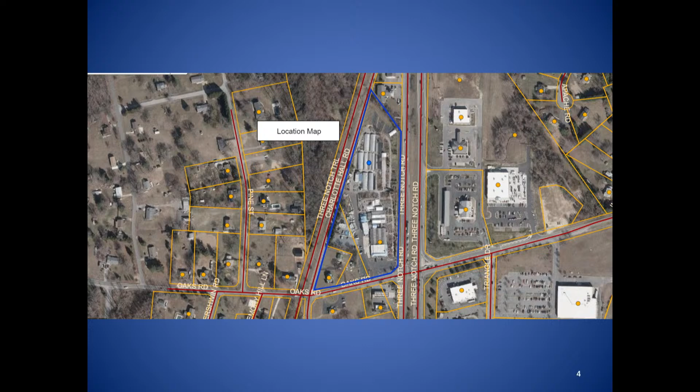Good evening, Chair, Vice Chair, and Planning Commission members. Agenda item 1 is a concept site plan for three-notch commercial. The concept site plan seeks approval for a 5,380 square foot convenience store with fuel sales and a 2,365 square foot fast food restaurant with a drive-through. The site is located at 37590 Oaks Road and 30315 Three Notch Road in Charlotte Hall. The land use is mixed use moderate intensity, and the zoning is town center mixed use.

Use type 60 is fuel sales, which are establishments engaged in the retail dispensing or sale of vehicular fuels and lubricants or household propane. Use type 48, convenience store, are retail establishments engaged in the sale of prepackaged food products, household items, newspapers and magazines, and sandwiches and other freshly prepared foods for off-site consumption. Use type 74 is a fast food restaurant, an establishment that offers quick eat-in or takeout food service, accomplished through a limited menu of items already prepared and held for service, or prepared, fried, grilled quickly, or heated in a device such as a microwave oven.

Use type 115 is an accessory use for drive-through services, which are facilities that provide services to persons remaining in automobiles. The regulations for the Town Center Mixed-Use District provide opportunities for residential and commercial development within town centers, consistent with the comprehensive plan. Standards are intended to create an urban character and make the core area feel safe, pedestrian-friendly, and visually attractive.

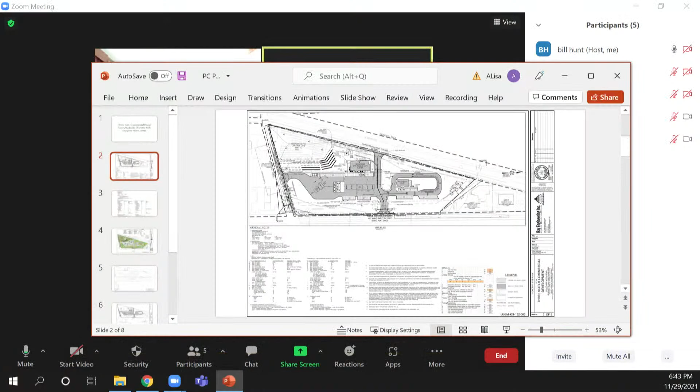All right, thank you again. Thank you for allowing us to be here this evening, and I'll just start right off. Okay. Yeah. Just start with the first, yeah.

So the existing property is 3 parcels. The existing use is an existing house to the southwest corner of the one parcel, and the remaining 2 parcels is where the Wentworth's business straddles, right? The 2 parcels, so there's 3 parcels. Just before I forget, and because I'm getting old, we're intending to plat so that the 3 lots will become 2, one parcel for the Starbucks, one parcel for the Royal Farms. So there will be a lot line adjustment for this property that will happen.

As staff noted in the report regarding the square footage of the site, it's a Royal Farms convenience store with fuel. There is regular fuel and diesel fuel. If you look at the plan, you'll see on the left that the angled canopy area is where the diesel fuel would be, and the remaining area would be regular fuel.

The setup is that you see the black, darker boxes - those are piers, and in the center is the dispenser, so you have one car on each side. If it was full, 12 vehicles would be parked. As far as the diesel fuel, whether truck small or large, you would have 6 of them on the left there, to the south of the site plan.

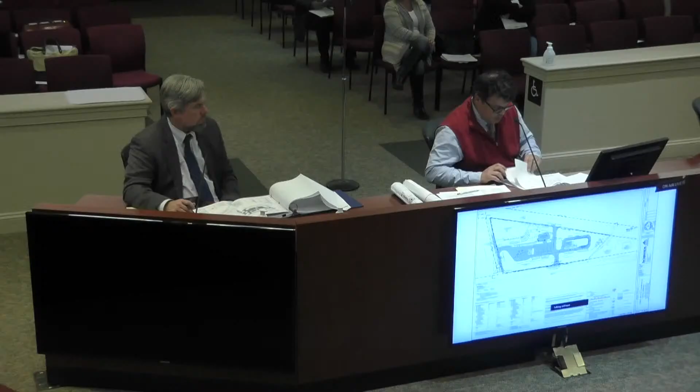With regard to stormwater management, environmental site design, which is required per the state for our engineering, the site impervious area was actually close to 206,000 square feet. The development is not quite half, but it's close - it's about 117,000 square feet. So from an environmental standpoint, an impact, it really will be enhanced. It didn't have stormwater management before. It will have it now with the design, and there's less impervious area.

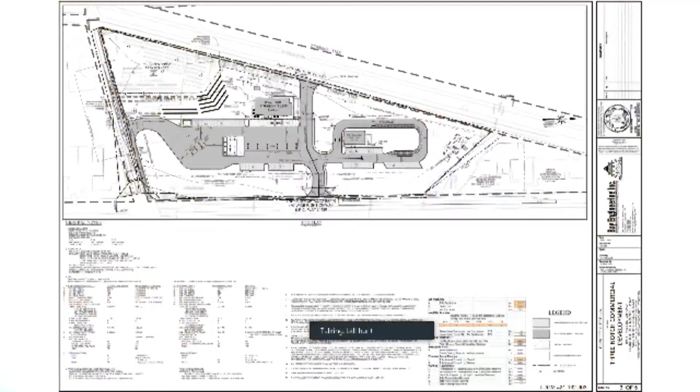So from that standpoint, there are improvements. You can see on the slide here, to the right or north corner, there will be a gravel wetlands device that will capture a majority of the water. Everything flows down to that point. There's a ditch between the two properties - this property we're developing and the adjoiner - and the water all flows down to that point. As far as drainage goes, it goes across the road through a culvert and underneath the trail, and then continues on the property to the west. That's the basic drainage pattern of the site.

So we're able to collect the water, treat it before it goes off-site, and that works out well from that standpoint. Vehicle circulation is pretty standard internally for the site. Vehicles coming in will go right or left and be able to circulate. There's ample parking for both sites - more parking than required as far as code on the Royal Farm side, but we mitigate that through the code with additional plantings, which staff has reviewed and approved.

And we could probably slide, if you don't mind. That's a lot of numbers. Keep going, please. There we go. That's, as they say, a prettier picture.

So this is the rendering, and you can see the green and the landscape. This again is preliminary - we have our buffers required per units, but have not yet picked species and such. But as far as the numbers, we meet the requirement for what we have, either for buffers or internal parking offsets and needs.

If you're on Three Notch Road, you'll see to the north a sidewalk that comes up. There would be an ability to cross at that point, and sidewalk connects to the Starbucks. The sidewalk then runs again on the north of that combined road, gets you to the Royal Farms. There's pedestrian accessibility along the front of the Royal Farms to the east side of it. Then the walk continues south, gets to Oaks Road again, and heads west to the intersection of Oaks and Charlotte Hall Road.

And am I correct, there's a notation on the site plan showing there's also a bike rack for any individuals that may ride bicycles to the site? Yes, it's pretty standard for both sites, both Starbucks and Royal Farms, to have bike racks. They like to incorporate that in their site designs.

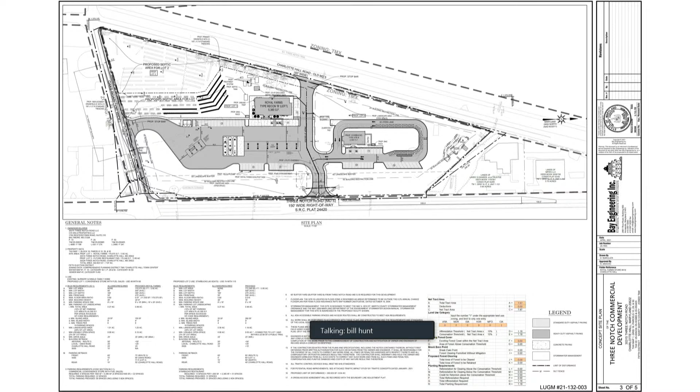Do you have anything else you'd like to add about the site plan? Ms. Chandler will jump in a minute and talk about the traffic issues. I always tend to think talking less is better, and I'll take questions if needed.

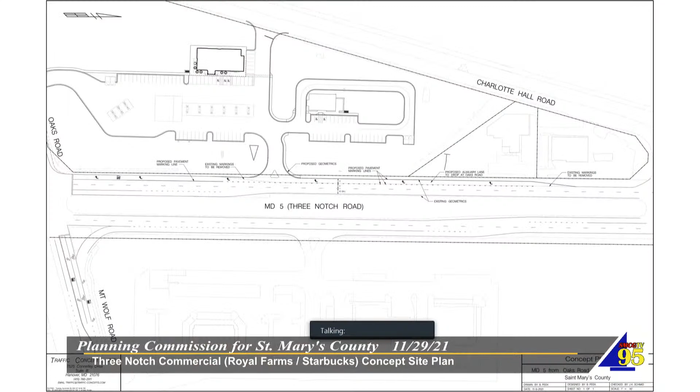I see the sidewalks here now, the internal ones. When you were pointing to your screen, it wasn't really being pointed out on the viewer screen. I just wanted to see if maybe we could get a tighter picture of that so they could see where those sidewalks are running within that site, if that's possible.

I think this slide probably shows it best. I don't think you guys can see mine. If you put the arrow there, Courtney. So there's the walk as it connects to Three Notch, going west to the north side of that entrance, and then you have connectivity going across. There would be a hatched area for pedestrians to cross. Then the walkway gets you either to the Starbucks, or you'd go up and then to the left or south, in front of the Royal Farms, and that sidewalk continues all the way to Oaks Road. Then connecting to Oaks Road, it would go west to the intersection of Oaks and Charlotte Hall Road.

Were you planning on having any sidewalks out on Route 5 itself? I see you've got one from Route 5 into your site, but along Route 5, were you going to put any on there? We currently don't show any, but if it was something conditional or something that needed to be addressed...

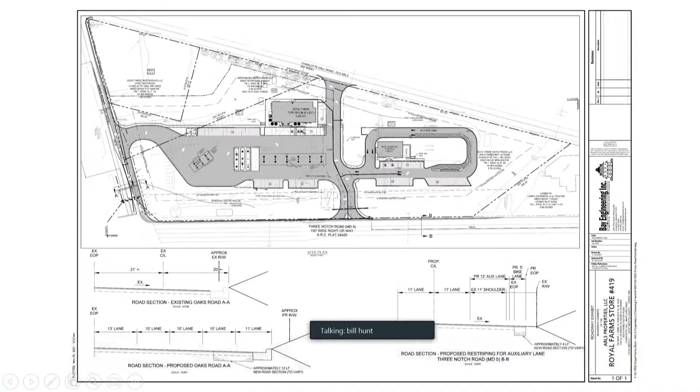Yeah, so actually Mr. Hunt can show you the aerial, you're looking at the aerial. So there's a lot of structures and buildings out there, and when we did our ALTA survey, or higher level surveying, we went out there and actually started locating stone, gravel.

There's just stone and gravel everywhere, with some green on top from plants, but when you move that stuff aside, there's a lot of impervious area. Actually, the way it worked from a code standpoint, from stormwater management for the state, it met the requirement for what's deemed redevelopment, because the impervious is above 40% for the site.

We also had some preliminary soil borings done out there, and a lot of times we find this with older sites that have been abandoned, where the weeds have grown and you look at an aerial and it looks like it's all green. But you go out there and do a boring, and it's just a little bit of skimming on top, 8 inches of stone and a bunch of junk buried. There's technically no pervious happening, it's basically just a surface skimming of dirt and weeds that have grown, but there's nothing there. So we found a lot of graveled areas out there.

So when we mapped that all out and showed it to the engineering department and reviewed it, it was clear that it met the redevelopment requirement, and the impervious was going to be decreased by quite a bit. Plus the fact that it had no stormwater management prior. No, it had no stormwater management.

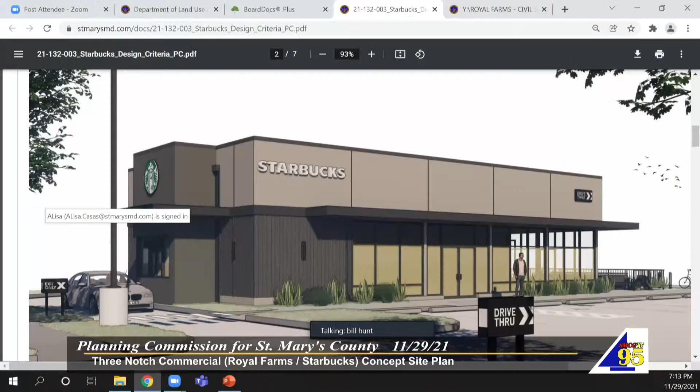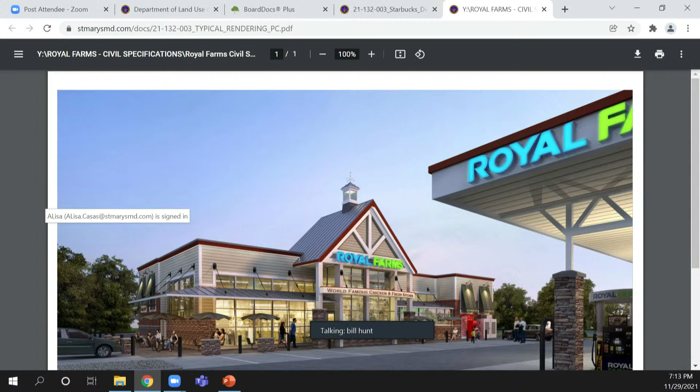And there's the Starbucks that I see on the screen. And if you look at the Royal Farms rendition, it is markedly different. Right, I can definitely ask.

The typical situation with Starbucks is they will not build or construct their building, so that becomes our responsibility. So I suspect, but once again I can't promise you at this point, that if we're willing to put in additional capital, they may be willing to work with us. As you pointed out, they do take other buildings and retrofit them to be a Starbucks. So I think that is a possibility, and that's something we can request of them.

I guess what I'm getting to is that what they want is, when somebody drives by, they want them to instantaneously recognize it as a Starbucks. I get that, and I get the colors, and the colors in this other location are actually pretty close. But again, there's some architecture involved in that location in California, a more traditional look than this. And given that these things are going to be side by side, I understand what Starbucks wants, but Starbucks is a big company. Just because they want it doesn't mean they get it.

I can jump on to what Mr. Evans is saying, Mr. Rosemore. The one attachment we received, the traffic mitigation proposals, has a lot of aerial photographs on there, and you'll see the Wawa and some other unlabeled building across the street. Obviously the Royal Farms renderings that were shown to us all show peaked roofs, and this Starbucks option plus the two alternative options all show a flat roof.

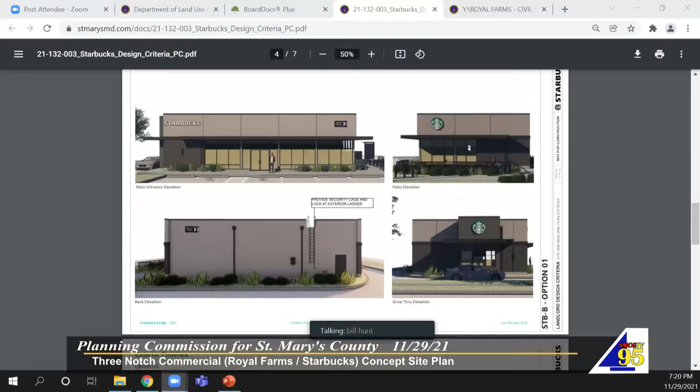Okay, nickel and dime you right to death, but that's just what we do. No, that's okay. And that rendition that's up, the backside - I get it, backsides of buildings are backsides of buildings, and it's not a problem unless you have to look at it. So I think that's a fairly inexpensive way of addressing that back wall.

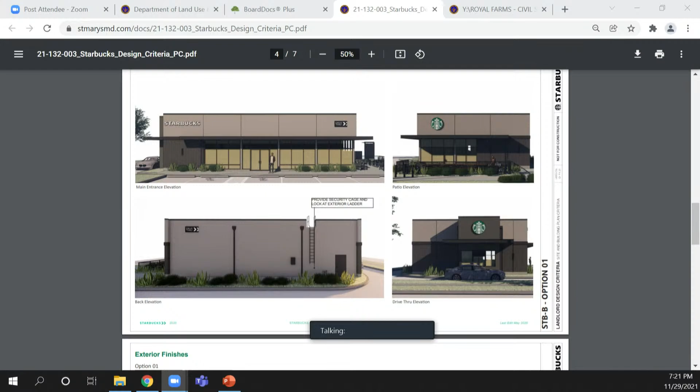Yes sir. Okay, is there any other questions or comments for the applicant? No, traffic questions - we're saving it for traffic.

Batter up, Ms. Chandler, it's your turn. Was there anything you wanted to add? No, I think that's all. We have a couple slides that Ms. Chandler can go through on traffic. I don't think she's sworn in yet, Mr. Chairman. Oh, I'll definitely get her.

Ms. Chandler, I can see you, so I'm counting on you to raise your right hand. Do you declare and affirm under penalty of perjury that the testimony, responses, and statements you may give will be the whole truth and nothing but the truth? I do. Thank you, ma'am.

Would you give us your name and address please? Sure, Jackie Chandler with Traffic Concepts, 7525 Connolly Drive, Hanover, Maryland, 21076. Okay, Ms. Chandler, go ahead and start with your part of the presentation, and we'll pepper you with questions. Thank you.

A traffic impact study was prepared for this project to determine the adequacy of the intersections nearby. Those intersections included in the traffic study were the 3 access points for the development, as well as the triangle area - that includes Maryland 5 at Charlotte Hall Road, Maryland 5 at Mount Wolf and Oaks Road, and also the 4-way stop at Charlotte Hall Road and Oaks Road.

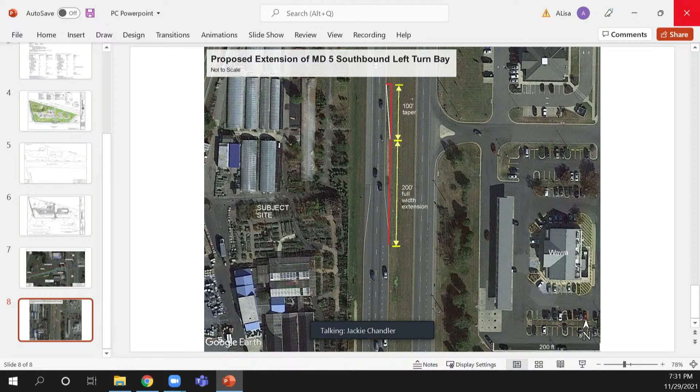Okay, we're getting to that. Hold on one second—I apologize, I'm also watching you guys on YouTube and that's a little delayed. Was that sharing now? Okay, I think that's it. Yeah, that's it.

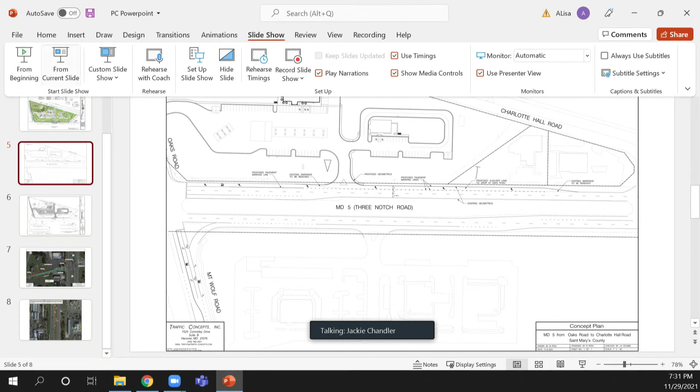So that existing right turn lane is being extended back beyond the right-in, right-out access. I was talking about Oaks Road, three lanes. There's not a lot of right turns coming out of Oaks Road during the peak hours, and they're controlled by the traffic signal.

Yeah, that's the problem—they're going to be stacked up waiting for people to be able to move with the flow of traffic, and they're all going to be backed up waiting to make a right-hand turn. I see what you're saying. So during the peak hours in the morning, there's 14 vehicles per hour making that right turn, and in the afternoon it's 28 vehicles during the peak hour. So even in the higher PM peak, that's one car every 2 minutes.

That's the projection. Ms. Chandler, can you state where you got those numbers from? The commissioners are asking that. I don't know if you heard—I could not hear that, I apologize. Traffic counts were conducted at the intersection.

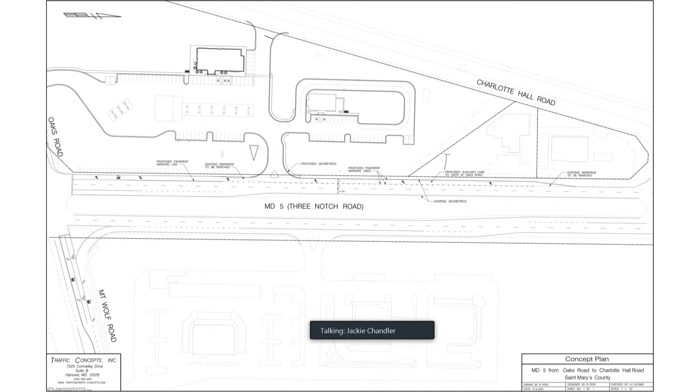So those were existing volumes, and then we added in the percentage of folks that would come out of the site that would actually use the Oaks Road access to make a right, rather than coming out of the new right-out access on Route 5. Was that during—

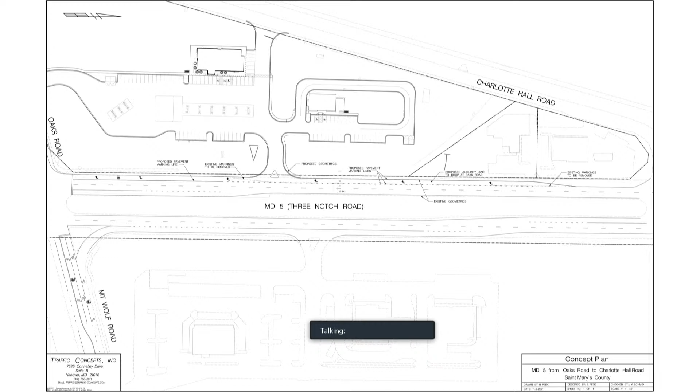Was that a week? Ms. Chandler, did you hear that question? She's on a little—no, I'm sorry, I'm not able to hear the commissioners. The question was were those counts taken during the week or on a weekend? Was that right, Ms. Robert? They are weekday counts. We're required to analyze during the morning peak hour during the week and then the afternoon peak hour during the week.

And those were actual counts that you all had done? Correct. That must be a different road than I travel on. Yeah, there—me too, me too, because it's a little bit busier than that. Yeah, hold up, I'm not doubting your counter, I'm just in doubt, let's just say that.

Can I ask a question? Yes. On what we're looking at now, that was the actual count that they were taking. The whole object behind a business being there is to increase the flow of traffic, so you're looking at actual versus what's projected to come. Is there—I believe Ms. Chandler said they took the actuals and added their projections that would be coming out of the Royal Farm site.

But Jackie, did you hear Commissioner Sinclair's question? I did hear that, yes. And so understanding that, we have most of our volume using this new right-in, right-out access to come right out to go southbound on Route 5.

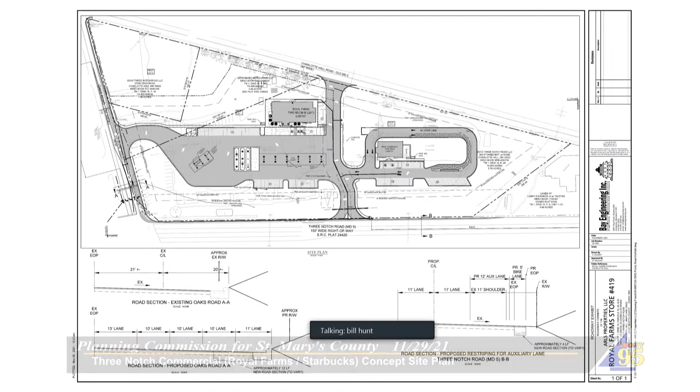I'm having a hard time seeing it. The length of the road from Route 5 to Oaks Road heading southbound - what is the distance from that exit heading south to Oaks Road? I can't see it on my prints. Does anybody have it? I think it's right around 500 feet, from the proposed access to Oaks Road.

Jackie, is it the same access point right now from Wentworth onto Charlotte Hall Road? Or maybe Nelson has that answer. Actually, there is a rear entrance where there's an existing gate. You can see the landscaping on the sketch everybody's looking at, and at the end of the landscaping there is an entrance there. So to your point, Justin, there is an existing exit from Wentworth at that point. If you've been back there, they have the chain link fence and gating back there. That's about where the entrance is right now.

And do you know the distance, Nelson? Just checking on Google, it looks like 600 feet roughly. Yeah, it's approximately somewhere around 550, I would say, to be safe, about 550.

Joe, was your question about Charlotte Hall Road or Route 5 to Oaks? Because I want to know what it is from 5 to Oaks. That's what I was asking. Okay, from the right in, right out down to Oaks - I think you guys answered for Charlotte Hall Road. I think it's approximately 500 feet along Route 5 from the right in, right out to Oaks Road. Because the right in, right out is per se close to the middle of the improvements, you can see the dimensioning on this plan: 530 feet for the lane as created, and then about another 500 feet to the intersection.

Okay, I have a couple more questions for Ms. Chandler. I didn't get finished. We were talking about the distribution from the site. I didn't see in the traffic impact study - and I'm sure it's in there - for some reason the reports have gotten extremely hard to read, or for me to understand, let me put it that way. Used to be a sheet that said site distribution, leaving the site 50%, 30%, 20%, if there were 3 of them, or whatever. I don't see that. What is the actual percentage assigned to them, or do you not include that in the plan any longer?

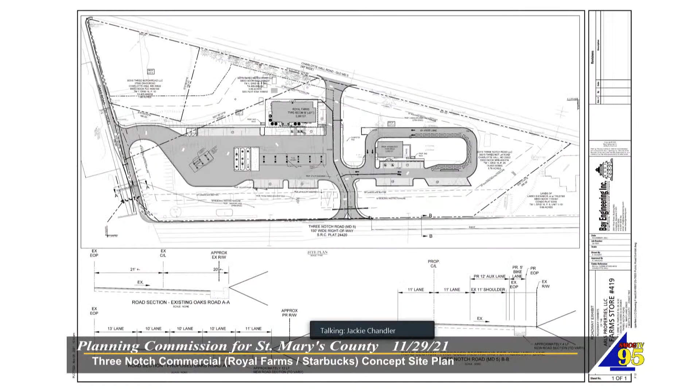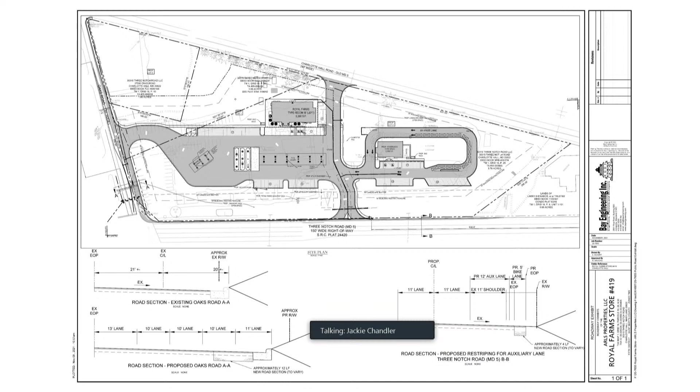I'm sorry, so on that exhibit on page 24, you'll see the site access point in the center of the page. So there are 26 vehicles in the morning peak making a right out, and 11 in the PM. Again, those are the new trips. The next page is a bit higher because those are the pass-by trips that we pull off of Route 5. So that's 130 trips in the morning and 100 in the PM, making that right out of the site access.

This page to me is very confusing. It's not as simple as it used to be to try to read it and understand it. I agree, and this one is a little different because it has a lot more intersections than you usually see - usually one site access point and then one intersection in either direction - and this one's a triangular piece plus the 3 site access points, so it is a bit confusing.

All right, so that's definitely a question mark. And it also used to have a page in the traffic impact study that showed, even though they really only check peak hours, what the daily trips in and out were projected for a site. And I had a hard time really seeing that in here. I'm sure it's in here with all the numbers on all the pages, but it's not spelled out as easily as it used to be.

It's not, you're correct, it's not shown in here. I'm gonna say, although it's not shown in here, that it's probably the convenience store, generally around 4,500 trips per day. Now remember, that's not vehicles - a trip is a trip in, so one car would make 2 trips, one in, one out. So it's half of that throughout the day in vehicles. And then the Starbucks is probably around 1,200 ADT. And that's throughout the day, that's 24 hours.

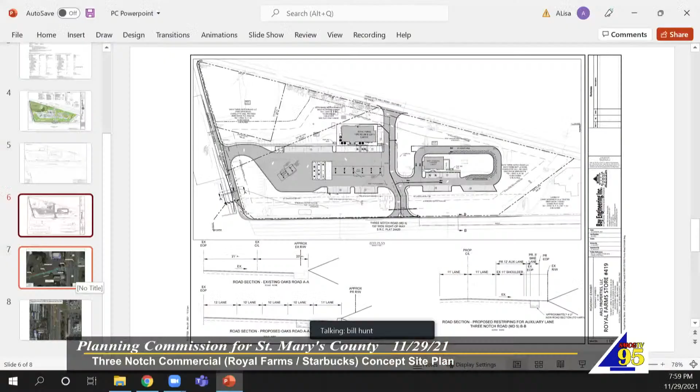Hi Jackie, this is Kim Summers. I have another question. Going back to the issue Mr. Van Kirk raised earlier, I have some more questions about those lanes designated with the blue arrows on Oaks Road. Given that people heading north will probably stop at Wawa or Exxon, and people heading south will more than likely use the Royal Farms, my question is, do we have to have the two lanes on Oaks Road heading north? Couldn't we have one that's going straight, one designated to go right, and one designated to go left? Because having one lane go straight and the other go south is very confusing, and I think it leads to more problems.

Well, that is based on the traffic volumes coming out. The left turn volume is much higher than the through and the rights even combined. So in order to reduce that queue, we want to have a double left out of there. There were projected to be 143 left turns in the PM peak, and only 57 throughs. So the best use for the lanes is to provide that double left.

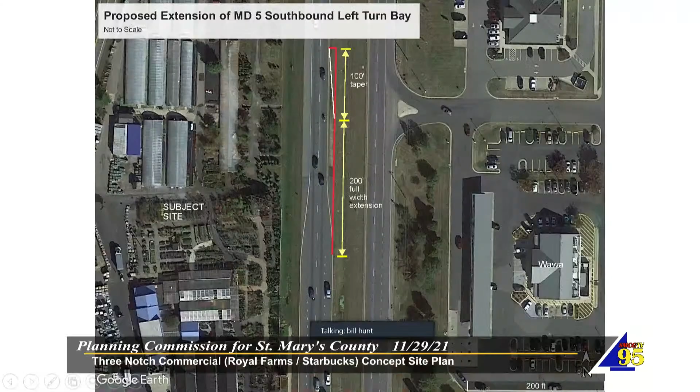Well, questioning on that - you're saying more traffic's going to turn left to go north. Part of your mitigation plan was to elongate the turn lane coming south that turns onto Mount Wolf Road. You're going to extend that out to alleviate some of that traffic.

That doesn't do anything for Royal Farms, because that's helping Wawa across the street get in there. I would think if you're making two lanes turning left to go north on 5, you should extend the turn lane heading north on 5 that turns into Oaks Road. Because if more people are coming out to go north, they've got to get in there to get back out. So evidently they're already heading north.

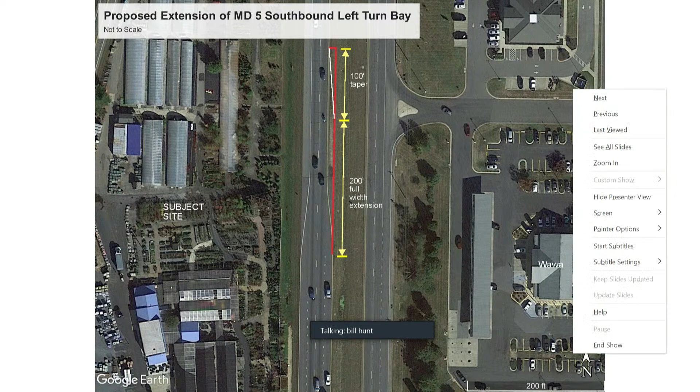They're going to turn into that site and they're going to stack up there. They already stack up there, right at that turnoff. So, to me, you're extending the wrong turn side. That's just my opinion, my one board member opinion. But I think you got it backwards.

I'm not worried about Wawa and Mount Wolf - I shouldn't say that, I worry about all those roads because of how congested it is up there. But what I worry more about is, you're saying now you have to have two lanes turning north to get that traffic back out, but you haven't helped the turn lane that's going into that site heading north. I think that turn lane should have been extended on the other side instead of the southbound side, in my opinion.

Agree with you. Okay, yes, we did look at that as part of the simulation and the queuing analysis in the traffic impact study. The northbound left turn lane is adequate in length. The southbound lane for the Wawa is actually deficient today, so this developer is offering to fix an existing deficiency. All of our calculations show the northbound left turn bay will be sufficient to handle the additional traffic.

I just disagree with that opinion. And like I say, if you'd shown us maybe a flow, a simulation, I'd like to see that. But of course, you can make it work any way you want it to work - I mean, it's pushing buttons and things like that. I'm just going by what I see when I travel.

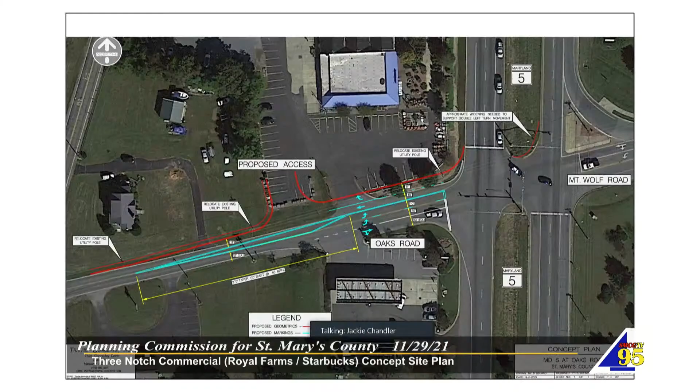That intersection is split phased. Oh, okay. Can you describe that, Jackie, so the whole commission understands? So those side roads go independently—Oaks Road will come up and those vehicles flow, then it stops, and then Mount Wolf will go. So it could work that way. Okay, I stand corrected.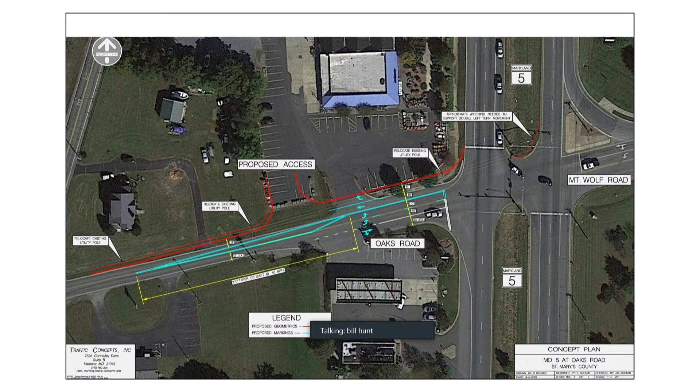Ms. Chandler, I just have a suggestion. I've seen some complicated intersections like this, and the conversations or questions are often solved when the Synchro sim traffic simulation is used—you throw the numbers in there and show how the queuing works and how the turning movements work. I know that's expensive and time consuming, but perhaps for future clients coming with their applications to this board, it could save a lot of us trying to figure out the numbers. As my mother used to say, a picture's worth 1,000 words.

Here it's numbers, not words. It's one thing to read the numbers on a piece of paper, but to actually visualize those cars queuing and how they back up on the existing conditions. I just think it's a timely expense, but definitely worth it for some of these more complicated intersections. We did it for the 7-Eleven on Route 5—we did both simulation and live pictures, that type of thing.

Yes, and we did provide a synchro analysis for this project. The printouts are all part of the traffic mitigation proposal. So DPW&T has reviewed that as well as the state highway. Mr. Evans?

With Mr. Van Kirk, what you suggested was a dedicated left out, a center left-or-through, and a dedicated right? Yes.